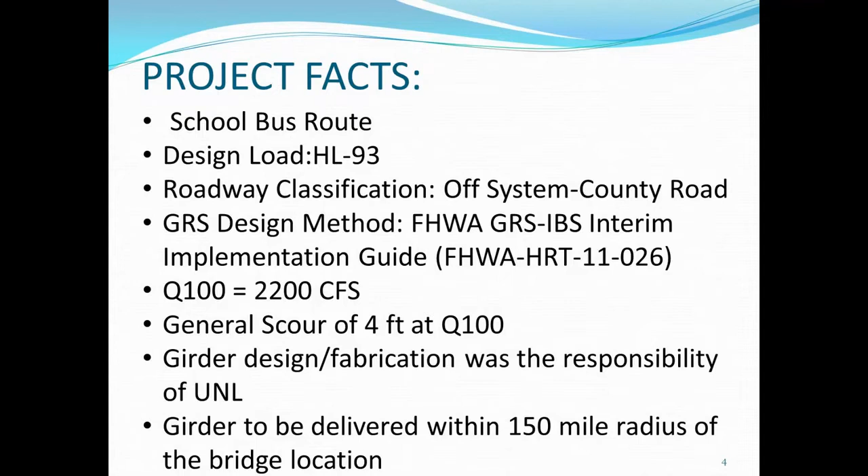The girder design was the responsibility of UNL under the CRIS contract, meaning the contractor had nothing to do with the design, fabrication, or delivery of the girder. The contract stipulated that the girder be delivered to the contractor within a 150-mile radius of the bridge location.

I know you probably can't see this plan clearly, but I'll give you a general view of the plan and profile. You can see the riprap and the width and length of the bridge, which I will state later. For this section elevation, the existing bridge only had a 40-inch CMP pipe.

The county stated that every year after the rain, the water overtopped the bridge, causing flooding, and they had to close the bridge. Therefore, we needed a bigger bridge opening or bigger size. Our hydraulics team came in and we selected this size, which is about a 58-foot span opening.

We can see the GRS abutment wings here, and we'll come back to that. The bridge clear width was 28 feet, and the overall width out-to-out was 32 feet. The GRS abutment from wing to wing was 40 feet, and from end floor to end floor was about 58 feet.

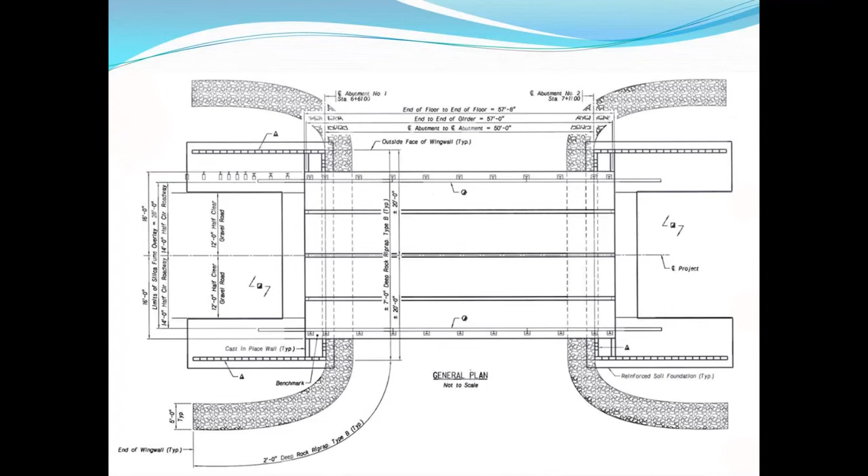Overview of the GRS abutment we used is really the typical GRS abutment, like the manuals in FHWA stated. It really consists of the RSF foundation, the GRS abutment with the granular backfill, and the facing, which we chose to be CMU concrete blocks.

We used this 7 foot by 5 foot by 7 foot to mitigate the scour, 4 feet we had calculated, and that was pretty good, conservative, but we wanted to feel good about this technique.

We used the minimum spacing of the GRS geotextile, which is 8 inches spacing around, all the way up. We doubled the spacing underneath the bearing. Since it's a county bridge, this has no approach slab. This has a gravel road.

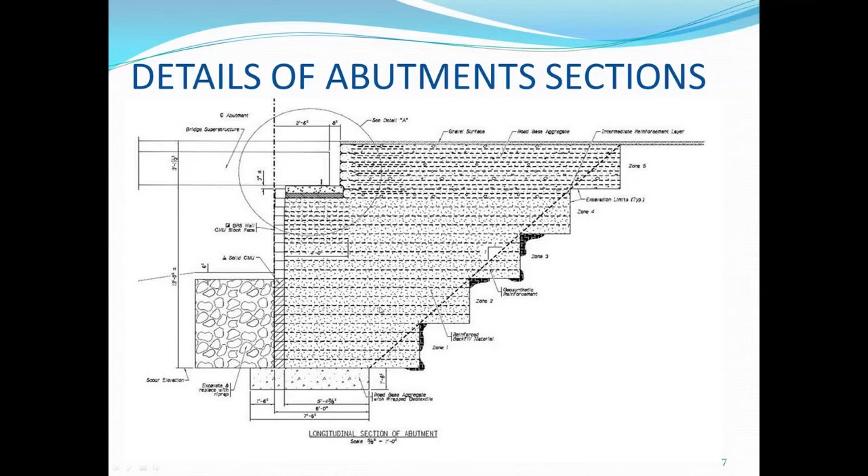Overall abutment featured the wing and the abutment; the RSF foundation is under the abutment as well as the wings, and it's a U-shaped abutment. It is a low volume road, consisting of about 125 ADT volume with 20% truck size, using agricultural vehicles, husbandries, and school buses.

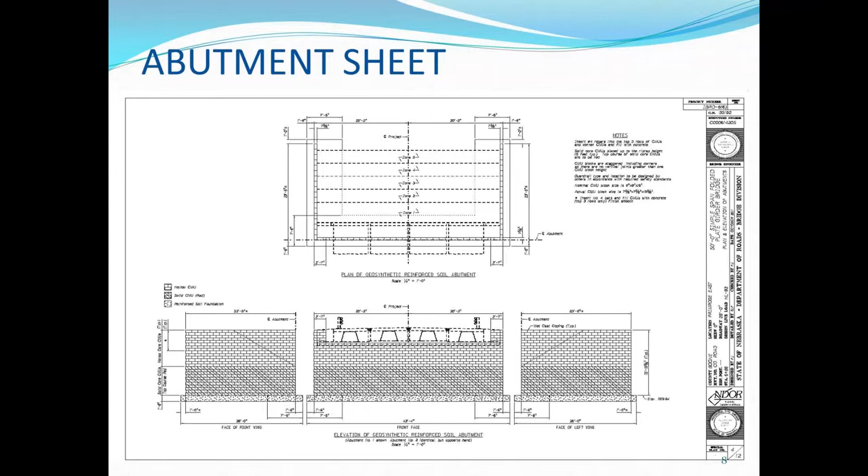Overall detail, I'm going to mention that this is the top of the girder seat we used. We used this cast-in-place girder seat. The top of the wall has to be connected with the concrete with rebars in it, and then the rest of it was a dry stack mainly.

Every GRS abutment was going to be laid down all the way to the top of the CMU unit, and then another block would sit on top of it as a dry stack only, which we're going to show some few photos of.

Overall the girder seat abutment, we're showing here the cast-in-place girder seat. The contractor, we gave him an option if he wanted to precast it. He selected to have the cast-in-place.

We will see the embankment for the gravel road that used as well - that's what we call GRS-IBS, which is an integrated system. The whole system will be deflected together with no bump at the bridge.

For the superstructure, it is a 4 girder system on folded plate using cast-in-place concrete. We used the empirical deck design for this one - it's four pieces, 2 exterior, 2 interior, joined with 8 inch closure pours with ultra high performance concrete.

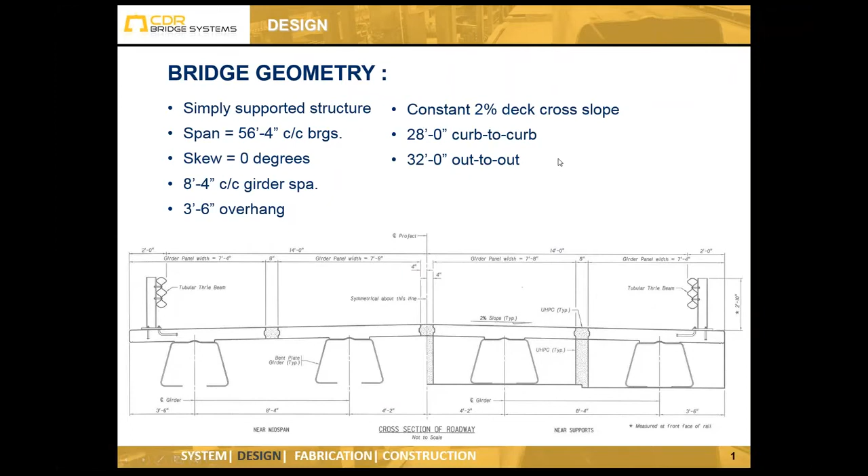The girder spacing resulted in a 7-foot 8-inch interior and 7-foot 4-inch exterior panel width, and used a 7.5-inch thick deck slab. The 8-inch closure pour did not use hairpin transverse reinforcement due to the use of the ultra-high performance concrete.

And as you can see in the bottom picture here, anchor bolts were to be precast into the deck slab for the structure-mounted guide rail.

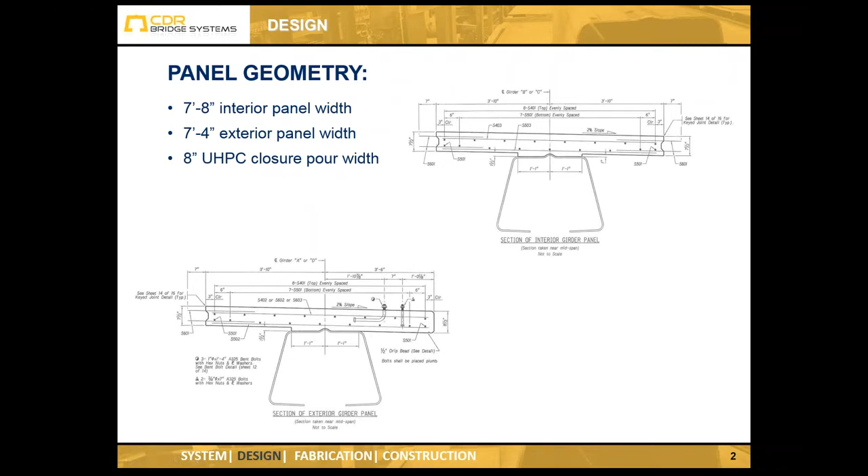The folded steel plate girders were designed in accordance with AASHTO LRFD 5th edition. For design purposes, distribution factors are based on a refined method of analysis. However, simplified distribution factors are available that give results similar to those of an I-girder. The design live load is the HL93, and live load deflection is limited to L/800.

The Boone County bridge used A709 grade 50 weathering steel. However, other corrosion protection methods are available, such as galvanizing, which was done in a folded steel plate girder bridge in Massachusetts, or by metallizing.

Section properties conservatively ignore haunch and closure pour, and the design is conservatively based on the girders being simply supported while the deck is being cast, or unshored construction. This is done to accommodate any future redecking.

However, shored construction is recommended and was used in both of the folded steel plate girder bridges currently in service. Shored construction minimizes dead load deflection and differential deflection between girders, which will make forming and pouring of the closure pours much easier. Low fatigue detail categories are used in the Boone County bridge. This particular one was a Category B fatigue detail.

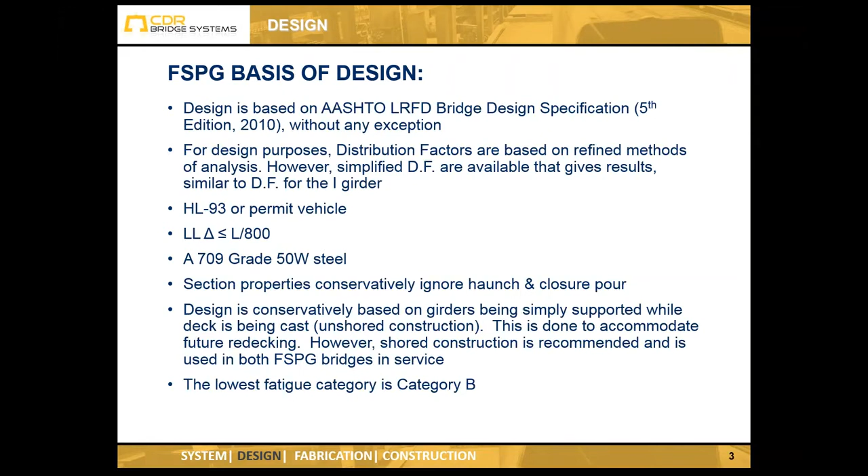The folded steel plate girder's wide top flange provides a good work platform during construction too, if needed, as you'll see in slides presented by Fouad later. The wide top flange allows installation of shear studs in the field if needed to meet OSHA requirements for fall protection. And the folded steel plate girder, unlike a regular steel tub, does not require lateral bracing of the top flange during unshored construction or redecking.

The folded steel plate girder has an opening at the bottom, which allows for easy inspection, and it can be used in conjunction with a large skew.

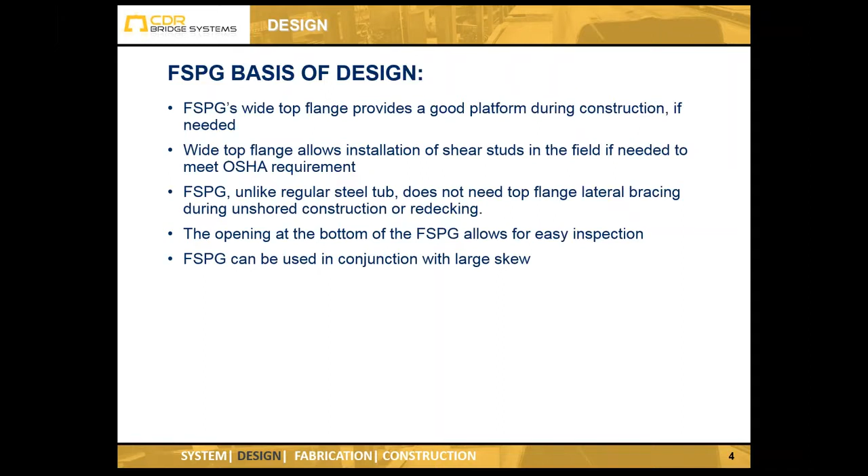The composite girder is compact and designed as a steel stringer. The composite neutral axis is located near the top flange. An additional 10 KSI of stress is assumed in the bottom flanges per AASHTO to account for lateral loads, but since serviceability or fatigue typically controls the design, additional capacity is available.

The folded steel plate girder is torsionally stiff. Intermediate stiffeners, cross frames, and diaphragms are not required, and this is important since differential deflection becomes more of an issue with skews greater than 20 degrees.

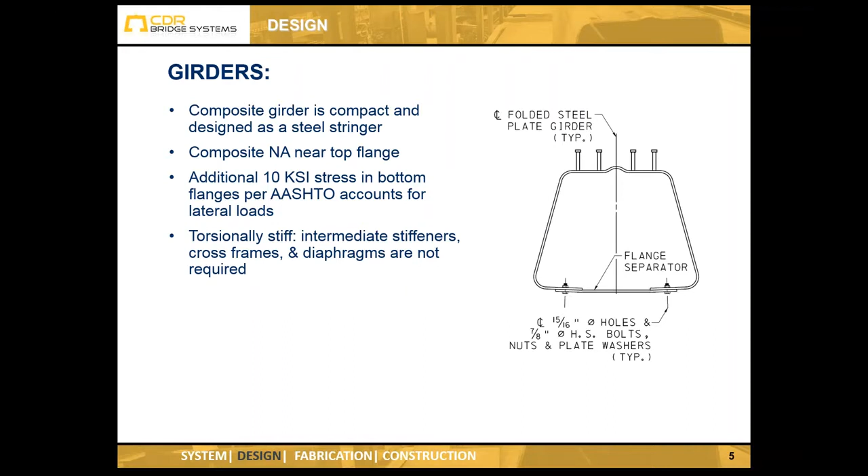The as-designed folded steel plate girder typical section used for the Boone County bridge consisted of a half-inch plate thickness, nominal depth of 29 inches, nominal base width of 44 inches, which resulted in an approximate 11 kip girder weight.

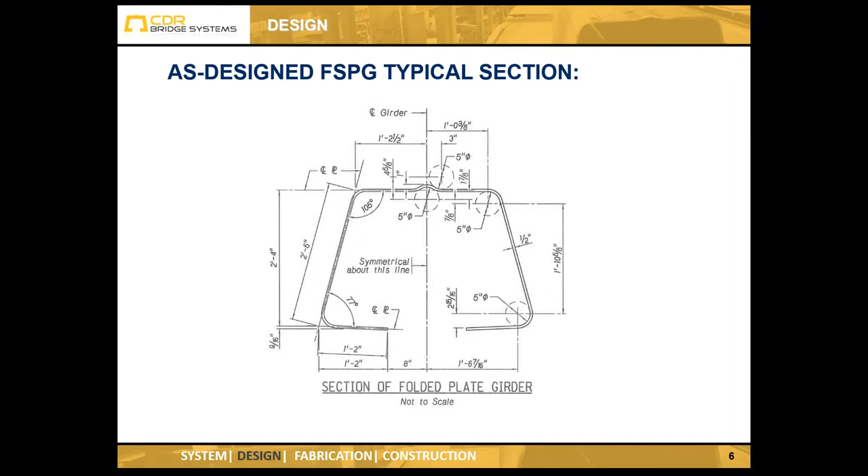The bearing assemblies consisted of bearing stiffeners, which were also used as forms for the concrete end diaphragms. Shim plates and sole plates are beveled transversely and longitudinally to provide full contact at the bearings, and elastomeric bearings were used underneath the sole plates.

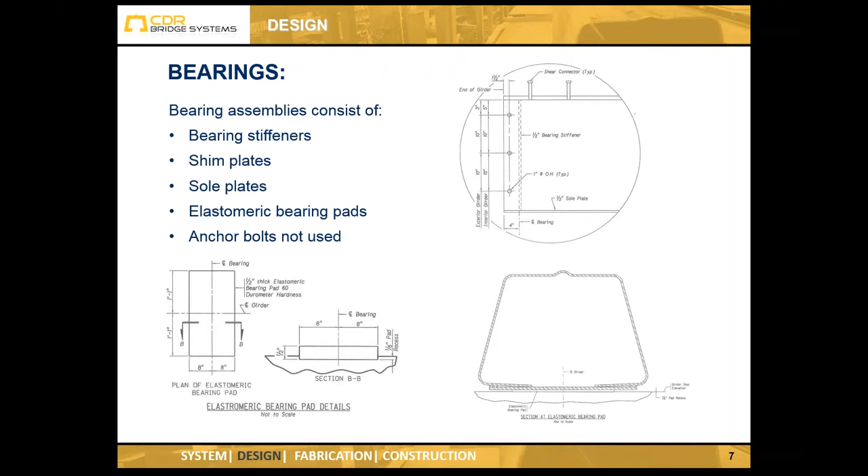Anchor bolts were not used in this application. Instead, it was decided to recess the bearing pads 1/8 of an inch. As I stated, back walls are not required. An 8-inch thick concrete end diaphragm was used to accommodate thermal movement and end rotation, and no approach slab was needed due to the GRS abutments in the approaches.

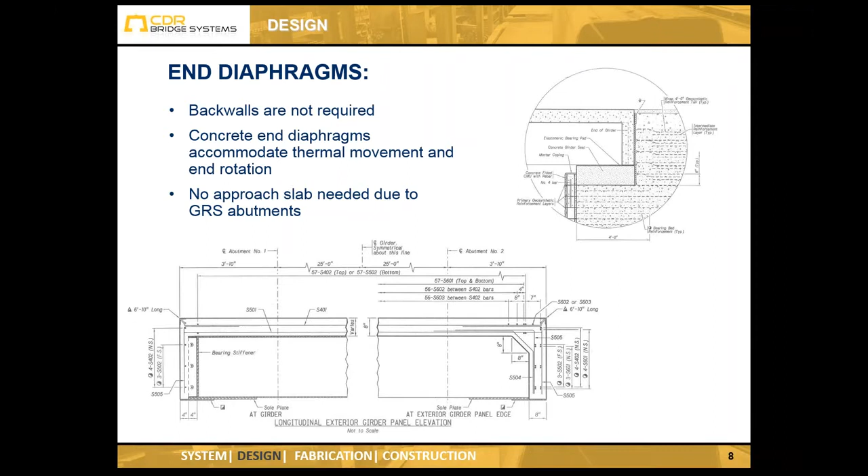The design resulted in a 57 kip maximum pick weight, utilizing normal weight concrete. If lightweight concrete had been used for the design, the max pick weight would have been reduced to about 35 kips.

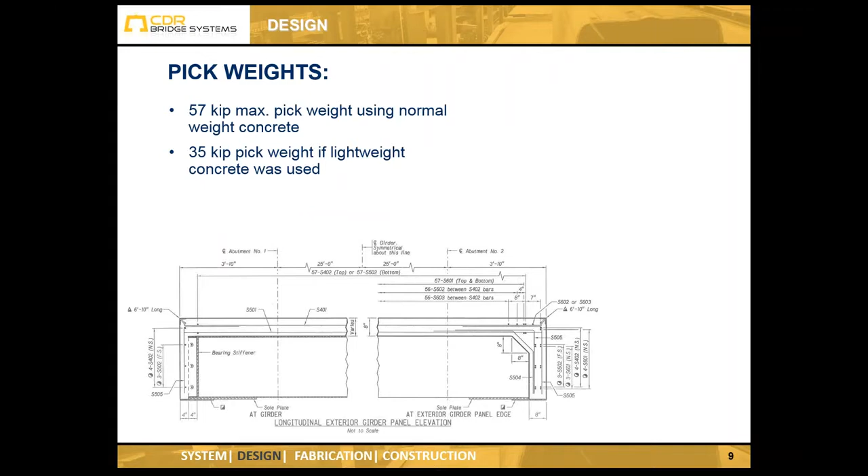The fabrication of the plate girders was performed in 4 simple steps: bending, installation of miscellaneous hardware, installation of shear studs, and then the precasting, which was actually done on site.

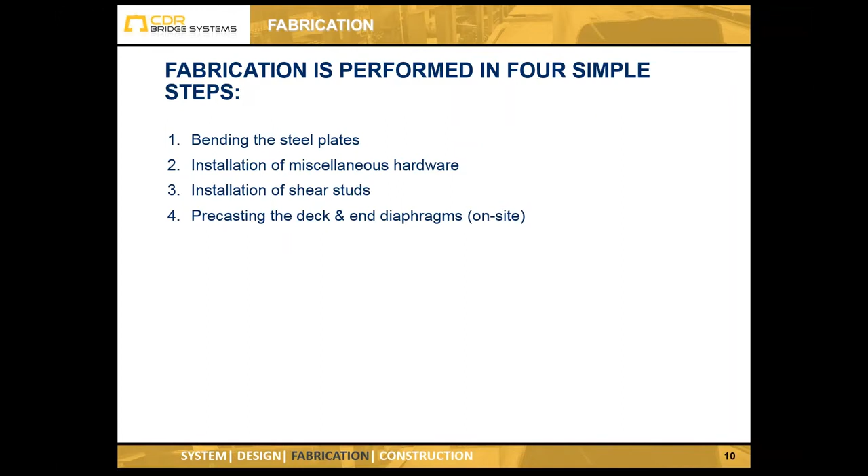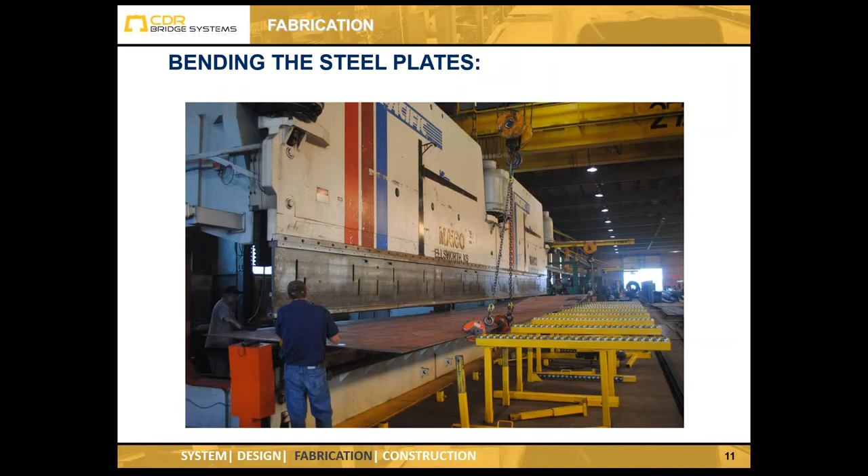The girders were fabricated at Myco Industries in Ellsworth, Kansas, and the bending required a 3 to 4 man crew due to handling. As you can see in the far portion of the photo, the plate is fairly flexible until bends start becoming introduced into the girder. The girders are cold bent in approximately 2 to 3 hours each, and this slide shows the final bend being introduced into the girder.

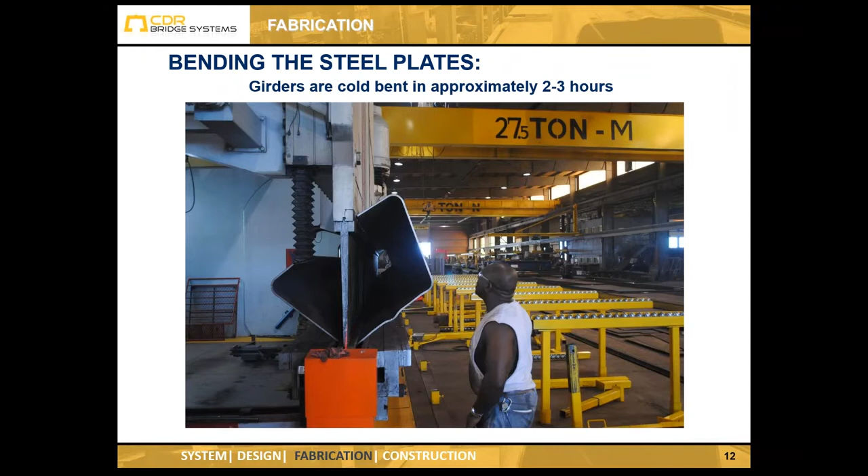Then the installation of the miscellaneous hardware, bearing stiffeners, flange separators, and sole plates were installed in approximately 1 to 2 days. The final step is the installation of the shear studs, in approximately 1 day.

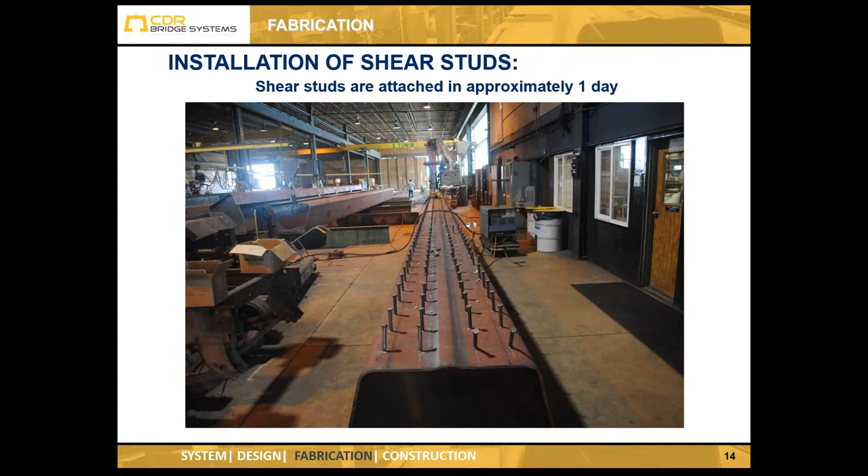At this point, the 4 folded steel plate girders were shipped to the construction site in East Primrose, Nebraska on 1 flatbed, where, initially, the contractor chose to offload the girders with a forklift and a strap. However, the strap snapped, and he dropped and damaged one of the girder webs. The web was heat straightened without incident, and all 4 girders were turned over to the contractor for precasting.

At this point, I'll turn it back over to Fouad to continue on with the construction of the bridge.

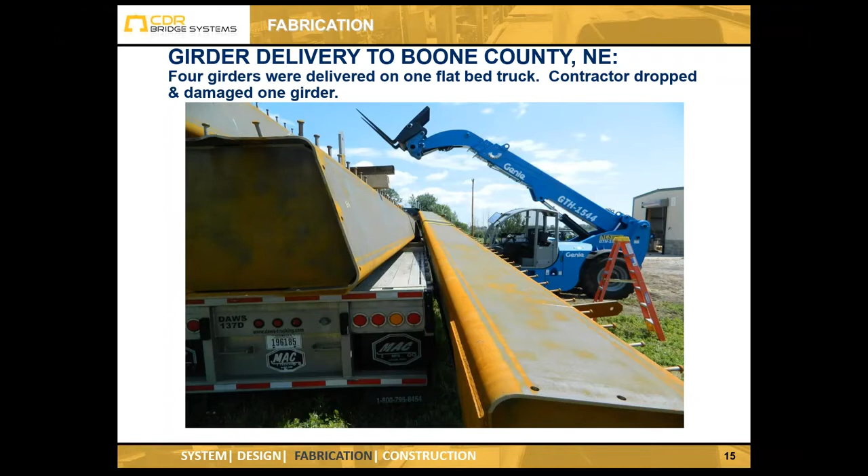Because of that incident that Matt mentioned, the contractor brought in a crane so he didn't want to use the forklift anymore. He brought the girder to a staging area where he's going to prepare to pour the slab.

He blocked them all to the final elevation of the proposed bridge. Remember, as Matt mentioned, with this system we cannot camber the girder, so we have to use shored construction to prevent deflection. Continuous and unyielding support was required per contract, and you can see we required the contractor to use this wood system, about 3 foot spacing underneath it, and again he blocked the girder elevation to the final elevation.

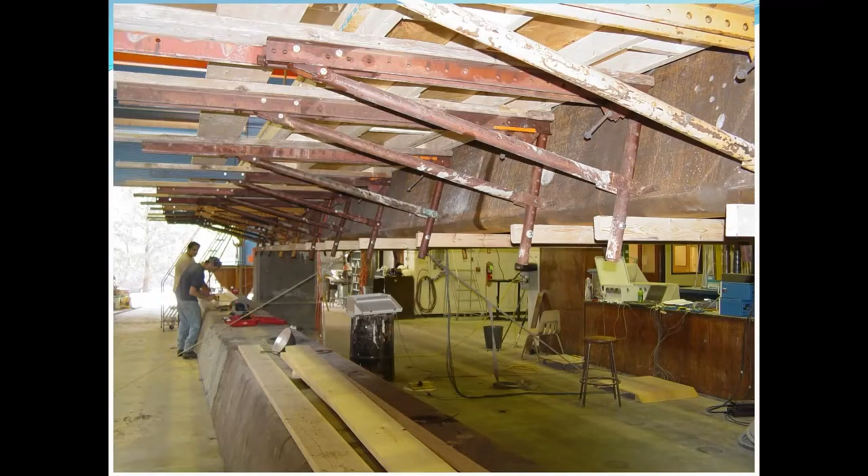Since the contractor was using folded plate, a new technology, he had no idea how to form the deck. So we gave him an idea, what the University of Nebraska did in their lab for the kickers outside, which was good if he wants to pour the deck one girder at a time. So we gave him that, since that's what they used in the lab.

Unfortunately, the contractor decided to form the whole bridge to be poured at once. So he devised his own system. You can see he divided those steel blocks to support the plywood, and the deck was poured over the plywood.

That was needed for him because he needs access to the bridge right away. He only had 24 hours to do the ultra high performance concrete connection.

On the right, we can see the iron worker already put the iron together and formed it. For the overhang, he just used the typical shoring, and it was easy for him to do because the bridge was already on the floor. Obviously he couldn't do that if he was doing cast in place over the bridge deck, so it worked out well for him.

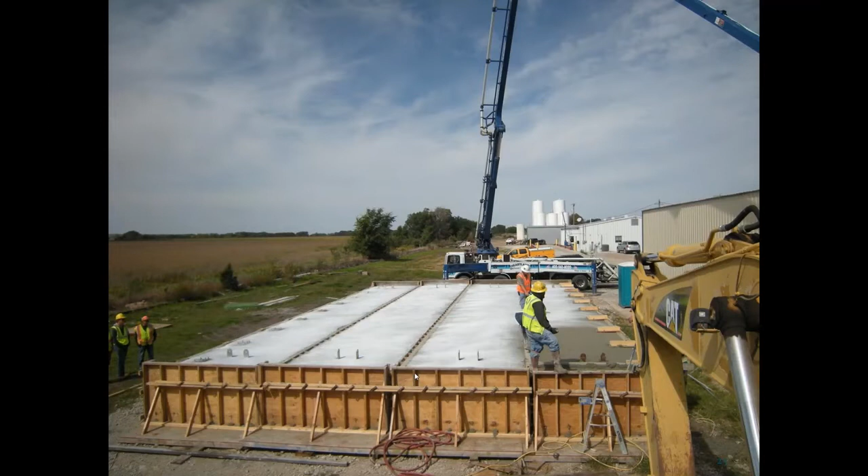For the deck placement, he used a pumper, as we can see, and he elected to pour one girder at a time longitudinally with the same system. After he finished one, he hand finished it, then did the second one, came back and did the third, and finished that. He put the curing compound, then came back and put wet burlap.

Side note: Nebraska Department of Roads has now changed our policy. We require 10 days wet cure burlap and 7 days curing compound. This is a new policy after this bridge was done, not because of this bridge, but because we had a lot of cracks in the past due to the way we were curing our bridges.

With this system we could easily use 10 days if he wants to, but for this one he used curing compound and then came back and did the wet burlap. Actually, we had a pretty good deck with hand finish, surprisingly, which is a good thing.

In the past project, using this system with closure pour, we had to use headed bars, which required a 12-inch opening, and because of shrinkage of the concrete mix we had to use an overlay. In this project, the attractiveness of ultra high performance concrete is its very low shrinkage according to research. So we used 8 inches instead of 12, and the rebars were easily connected together, unlike the previous one where we had a very hard time connecting the headed bars.

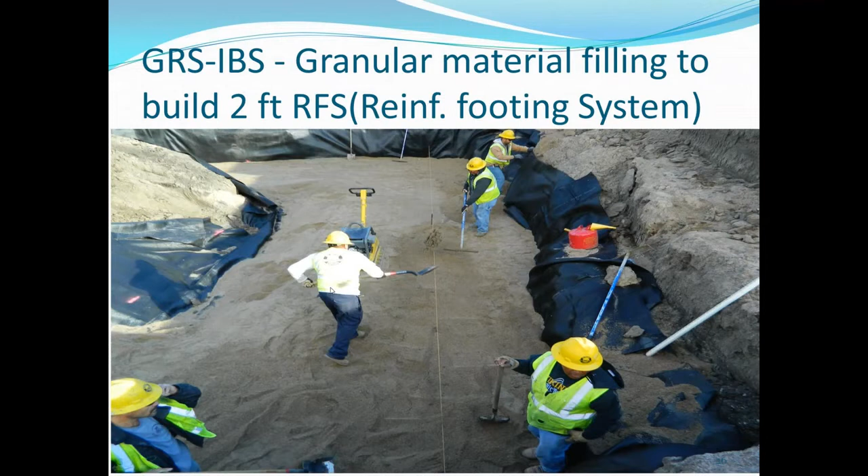After finishing the footing, he started laying out the first layer for the wall. It was very important for him to make the first layer straight, so he used a half-inch sand layer to help level the first block of the wall.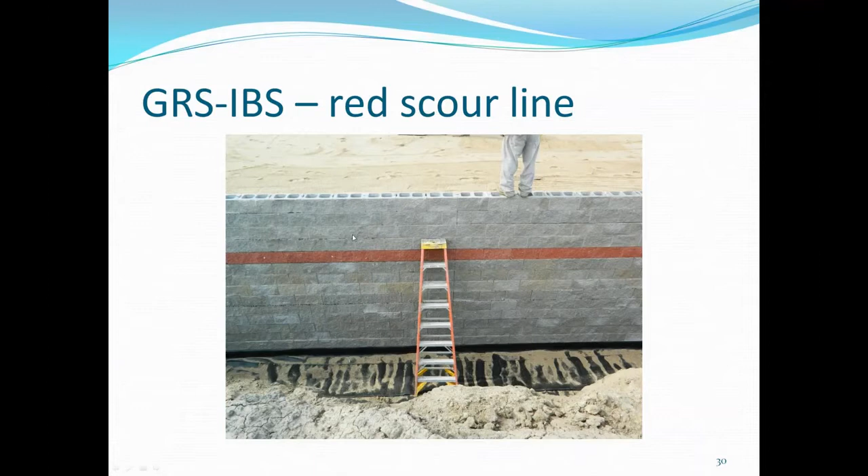Another note: we used solid CMU at the bottom and hollow at the top, according to the FHWA manual. The contractor stated it was hard for him when compacting next to the hollow CMU to keep it straight and level, so he had to support it. He asked if next time we could use solid CMU throughout, and I think that's a good idea.

Now we're trying to get the girder deck erection done. The contractor used 2 cranes, as I said before, and 4 trucks to move the girders to the project site, about a mile away from the staging area.

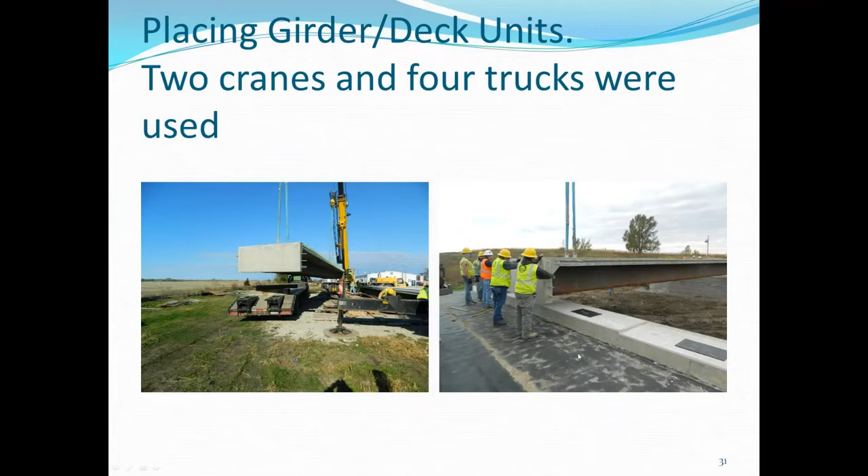Then he put it on elastomeric bearings and cast-in-place girder seat beam. Because he formed the whole thing together, we had very good alignment between units and very minimal differential deflection between them. That was a success for us, and we liked that.

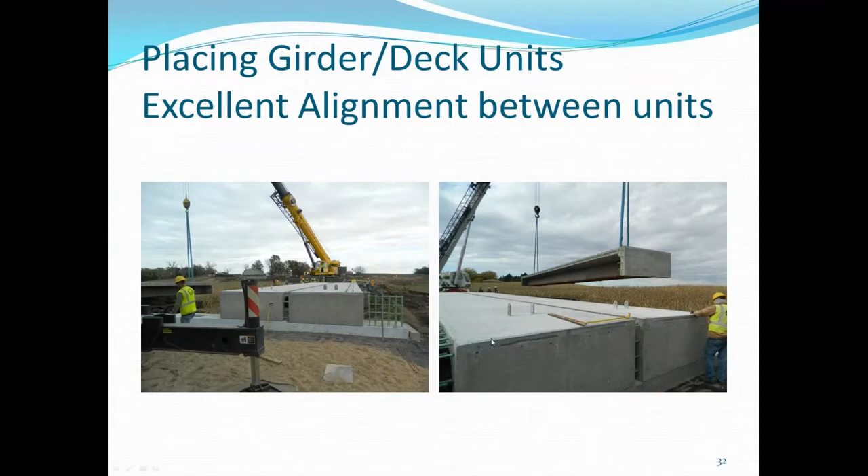Here we're showing the whole bridge deck unit in place. It took about 2.5 hours to erect all four girders together. In this photo you can also see we already completed the riprap underneath it, and Nebraska used topsoil for the riprap, so you probably don't see it, but it is there.

At this point, I believe we had used about half of the closing date already. Giving some back, he lost about three days to the rain. Now all he had to do was come back and fill in the approaches for the county road.

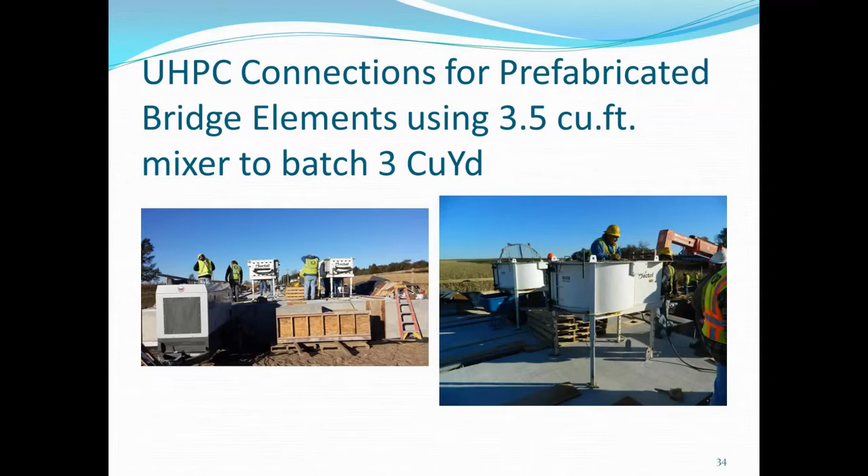For the ultra-high performance concrete, the contractor contracted Ductal from Canada. They came with their 3.5 cubic foot mixers. We only needed 3 cubic yards of ultra-high performance concrete to fill the 8-inch closure pour.

The representative was on site. We like to have two of them, but they only sent one, and I think it would be a better idea if we have two representatives instead of one.

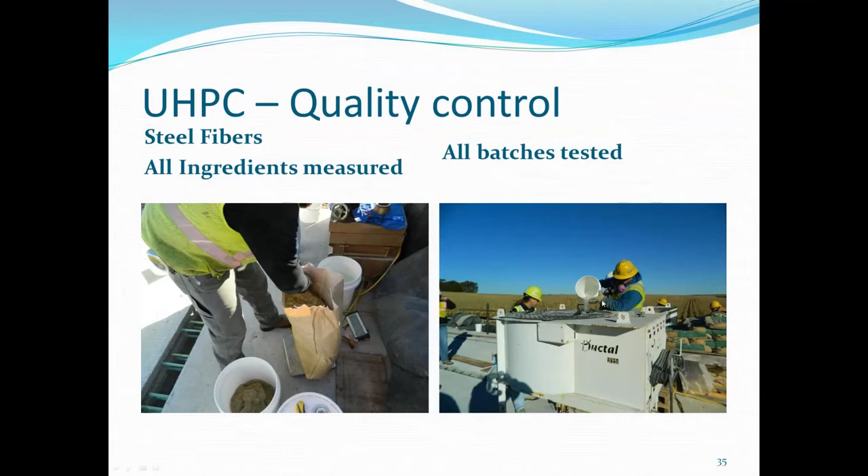Nevertheless, all the ingredients were measured for the quality control, and the supervisor was over here, and the mixing started. By contract, the mix was the responsibility of the Ductal company, and they chose a 21 KSI 28-day concrete, 12 KSI at 4 days, and about 8,000 at probably 24 hours.

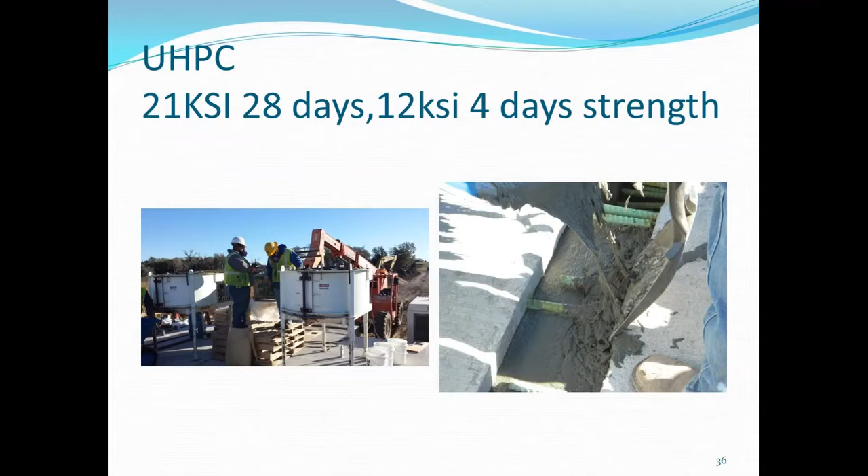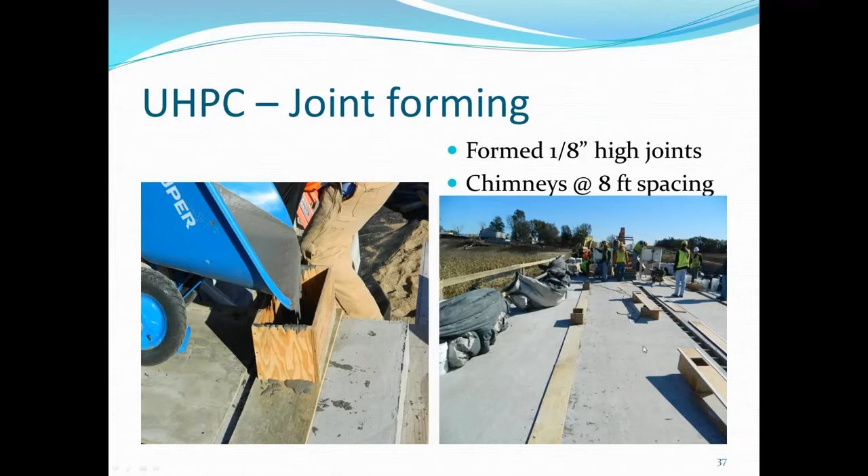We required the joint to be overfilled with 1/8 inch so it can be ground at the end, because of the self-setting nature of the ultra high performance concrete. So that's what they used. You can see over here they're using the chimney to help the matter, and that helps to keep the ultra high performance concrete moving. The spacing of the chimney was about 8-foot spacing.

The UHPC material had very good flow, so we didn't have any problem with that. Especially since we have only 2 inches drop from one end to another, the concrete was flowing okay.

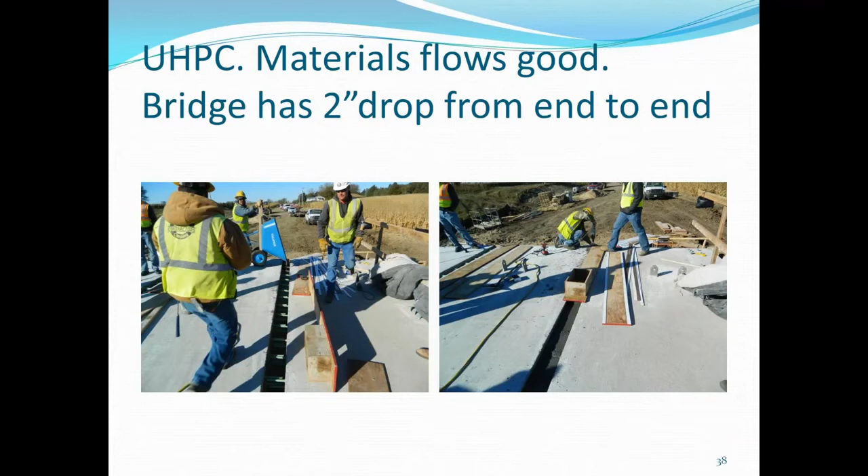In order to finish the grinding of the 1/8 inch, he was using a floor grinder, and it was really a little bit harder than he thought, but he got it done because the concrete was probably about 12.5 KSI, fast curing. So the grinding went well using the floor grinder. Got a picture here before the grinding and after the grinding.

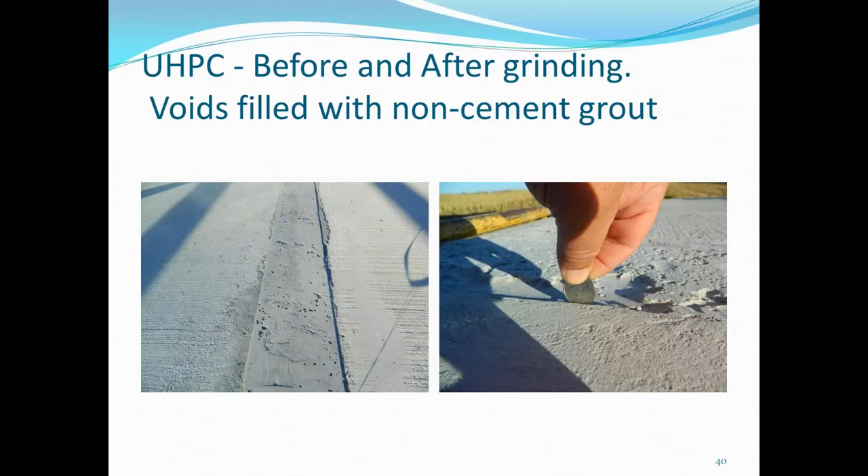Looks like the 1/8 inch overfill we provided wasn't enough. Maybe 1/4 inch would be better. You can see some settlement of the ultra high performance concrete, and that caused some irregularities in the joints. But it's not as bad as it looks; it was okay. So Ductal recommended using non-cement grout to fill the irregularities, and we did so. And then we ground it one more time, and then we were done.

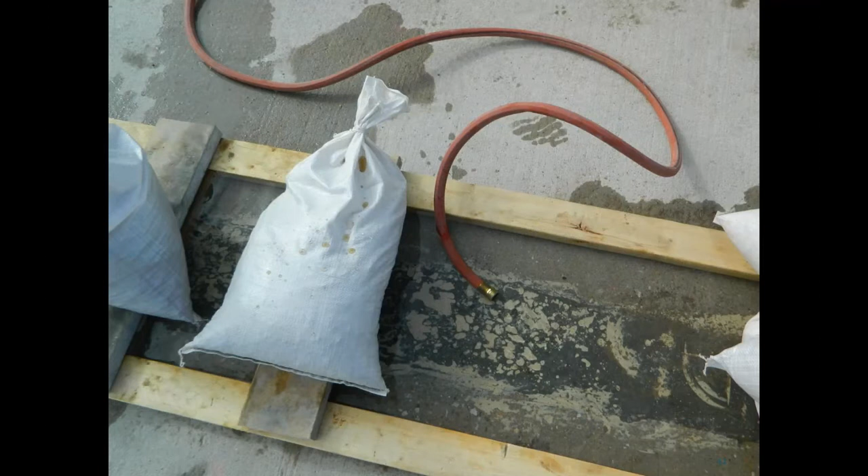Obviously, we're required to test for ourselves to see if we have leaks or not on the bridge. We did a water test. As you can see, the contractor dammed every joint and then flooded it with water. We made sure that we have enough water for every joint, and then we checked underneath, and we had success. We had no water drop whatsoever. Actually, I would be happy with dampness if there was any, but we didn't have anything, not even dampness.

So we think it's a success, we had no leaks, and that's a good material to be used on our closure joints in the future, and we're gonna think about that. You can see that he used the wood form underneath the deck to form the closure pour, and then you can see the trace of the wood forms. Nevertheless, we have no leak, no dampness, no nothing, so we think it's a success.

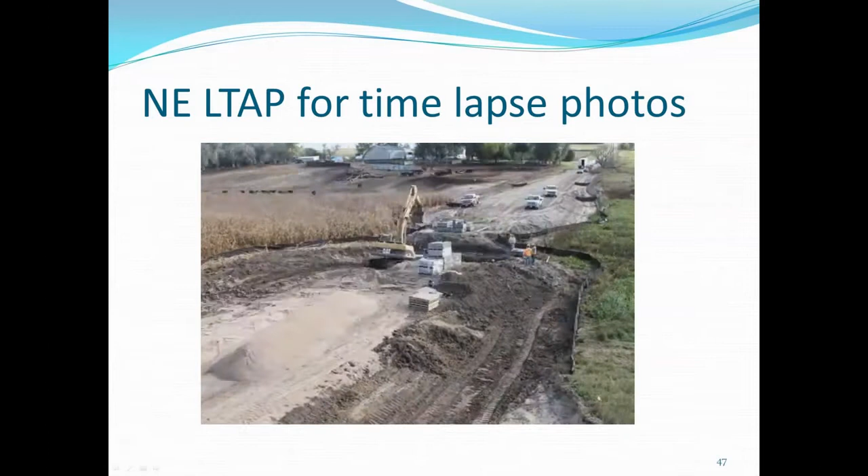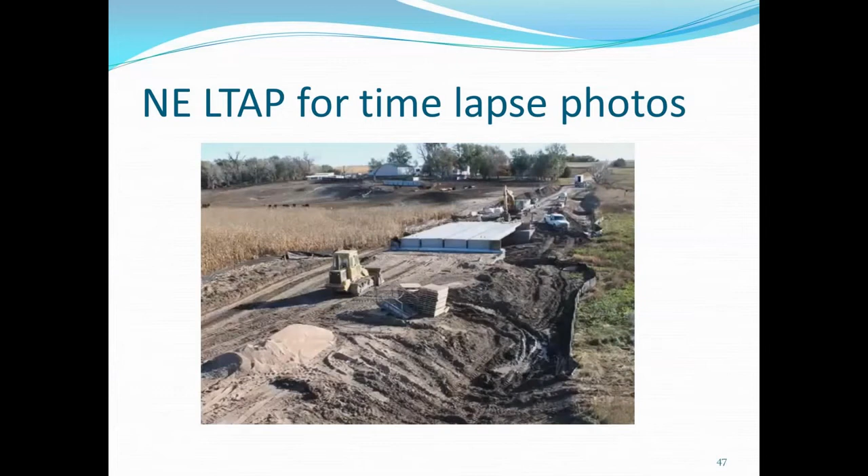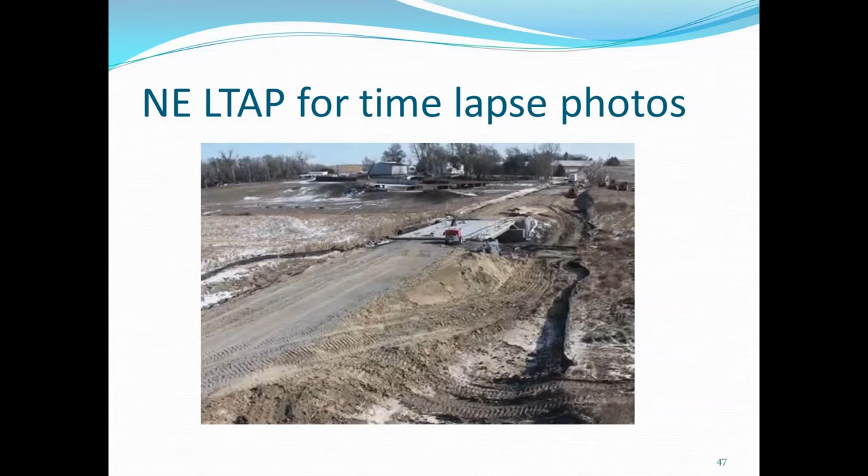And after that, the bridge was open to traffic November 19th, 2014. We gave the contractor back 3 days for the rain, so that's why it was probably about 33 days. But we considered his contract fulfilled, and he was ready to do what he needed to do for the bridge opening.

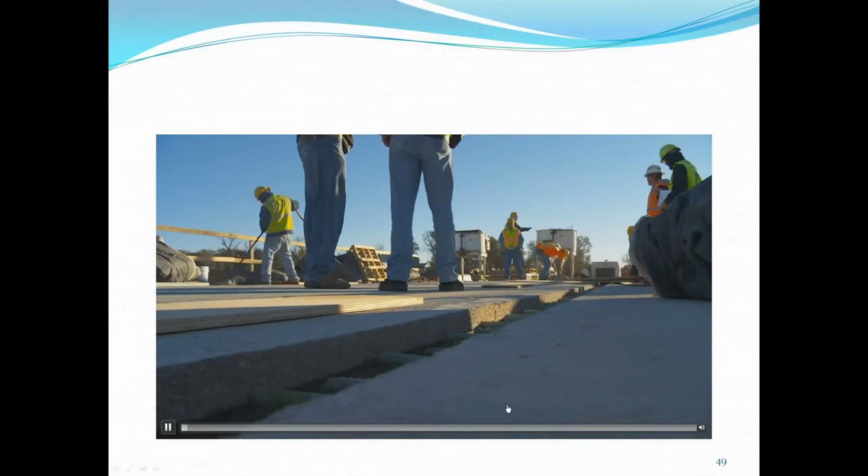Everybody's waiting for the cost, and that's what Khalil was talking about. It was a costly project, we can tell, maybe because of a lot of innovation in it and unfamiliarity of the contractor with the system we're using. We only had one bidder, the only contractor who bid, and he got the project. Even though we did advertise and we did have the pre-construction conferences, it looks like nobody was interested in doing a GRS abutment for some reason or another.

So this cost, as I said, is $455,000 without the girder. The GRS abutment was $265,000. If I compare it to a typical bridge we do in Nebraska for county bridges, it's probably double. We can probably do the same abutment with piles, sheet piles and the concrete beam, as we typically use, for about $150,000. Nevertheless, this is the cost of innovation.

Ultra high performance concrete cost $200 per linear foot, and we had 192 linear feet because of 4 joints on the floor, so it cost us about $38,000. The folded plate girders cost $90,000 delivered to the site, and that was subcontracted from the university to CDR, and he can speak for that.

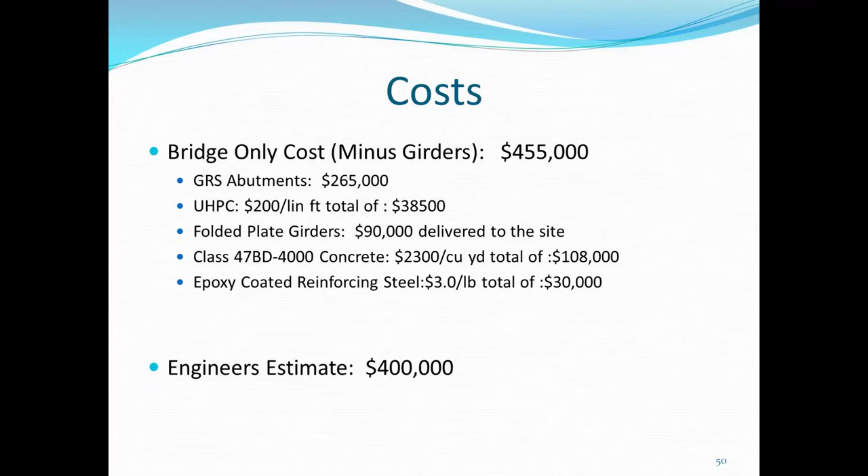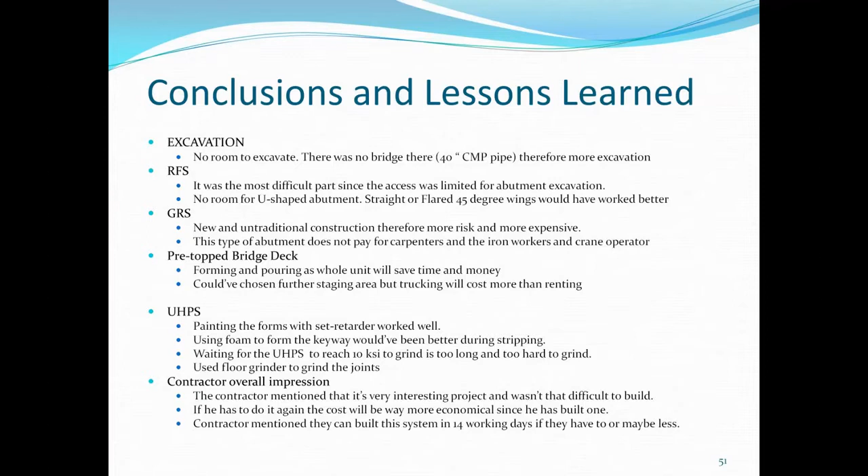Folks, we received a good amount of great questions during the webinar and, of course, prior to the webinar. And I've got them grouped for us. We've got those in design, and I broke the ones in design specific to the GRS-IBS wall and the folded plate girder. We got a few on the UHPC as well. We have questions related to construction, performance, and inspection, and of course cost. So we'll go ahead and start with the design ones first, and I'll go into the general design questions too.

So Fouad, I don't know if you can answer this one, but why was the bridge selected over culvert alternatives? Why a bridge, or why the folded plate girder? Well, remember we have a research project, and we were under the research IBRD. We have an implementation, and that implementation has to be for this folded plate system. At least at the beginning, we have to get a 60-footer or below 60-foot. Really, we waited a few years to get one on the state system. We couldn't find one. And when we got the county one, which is a short bridge, we grabbed it.

So really, for us, yes, I agree. We weren't comparing life cycle between these two systems, because we wanted to try. That's an implementation of a new idea, and that's really what happened. Now we know. If we have to do it all over again, at least we have an idea to select the appropriate system for every bridge. So it's a short tale. We had to use IBRD money for the construction, and that was good. That bridge was for implementation.

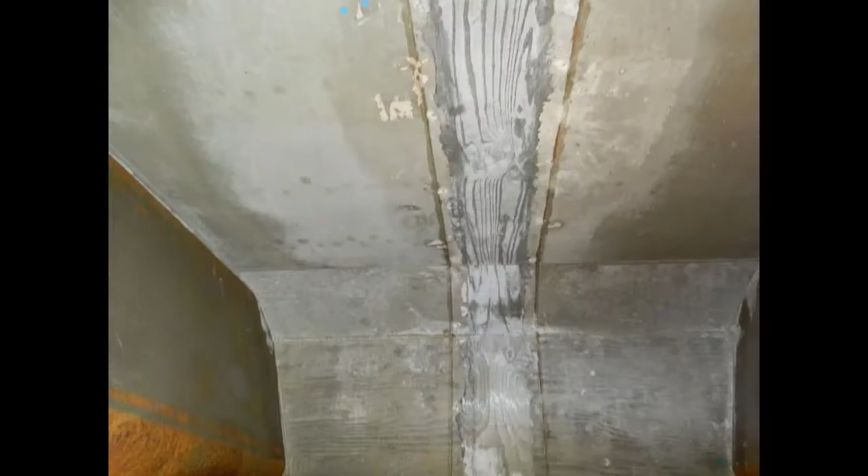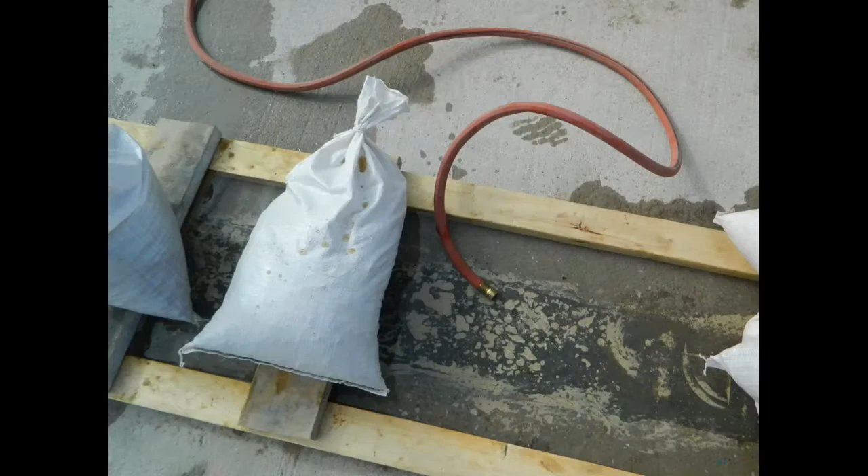The question was, what sort of beam seat size did you need at the bearing locations, both in front? Keep going forward - there it is. If you look at the abutment at the far end of the picture, you have a corner with your GRS-IBS, and you also have the beam seat in front of the bearing.

Was that prescribed for FHWA's guidelines with the GRS-IBS, and what kind of beam seat width did you have there? Let me check the plans - the beam seat width per plan was about 3 feet 2 inches behind the CMU wall.

The center line of bearing was about midway back there. Obviously, the concrete end diaphragm lines up with the rear of the seat, but I'm not sure if that answers the question. I think we have this - it's about 3 feet into this, 3 feet, from the wall.

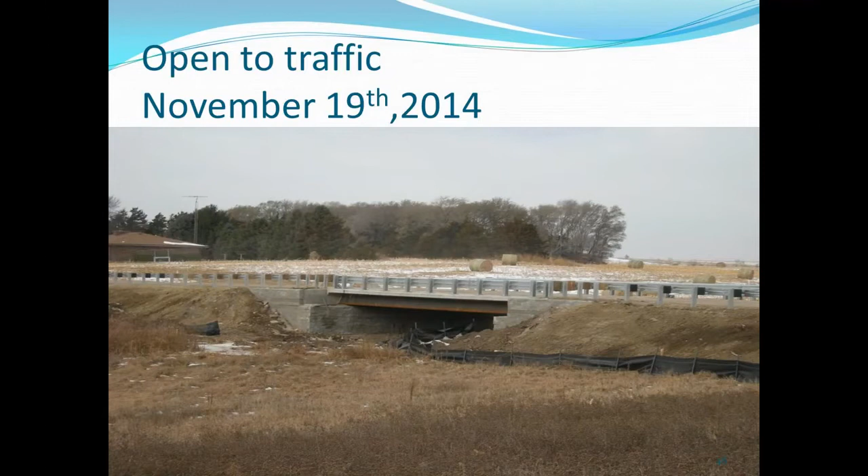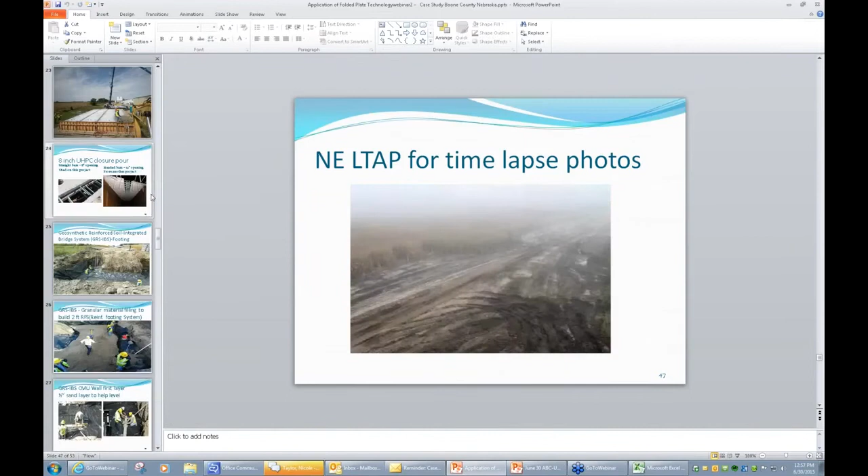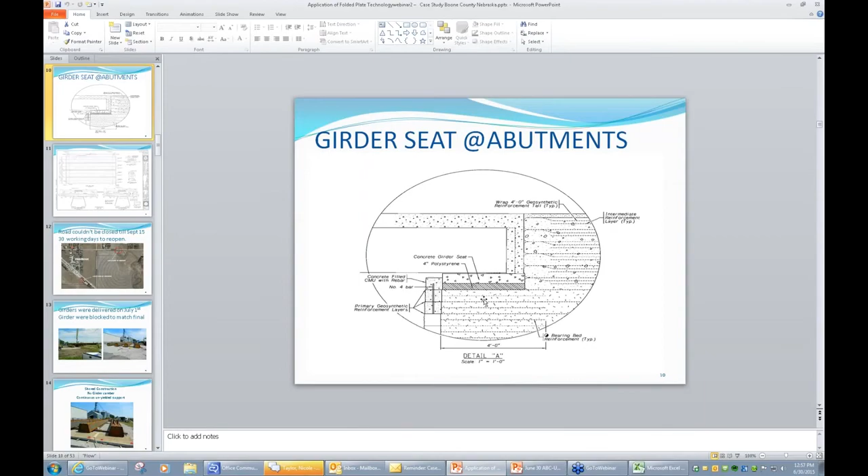Give me a second - I think if I understand the question correctly, that was shown at the beginning. Is that it? There we go - we had to go about 3 feet 6 inches beyond the wall so we could minimize the pressure on the wall, and that's the intent of it. That was in the manual and the guidelines.

Stay on that slide, because we have another good question related to that: can you explain the bearing installation without the use of anchor bolts? So why don't we use an anchor bolt? It's not a seismic area, so there's really no uplift on this bridge whatsoever - in Nebraska we have no seismic concerns.

And really what we do to prevent the walk-out, the elastomeric bearing would be embedded 1/8 of an inch into the concrete, recessed 1/8 of an inch. That will prevent the walk-out of the bearing, if that's the question. And then you've got the passive resistance of the wall up against your back.

Ben, can you hear me? Yes, Atorod, we can hear you. Yep, let me answer that question.

This is a very short span bridge, and thermal expansion and contraction is very small. It's a semi-integral type bridge, and it's allowed to expand and contract freely, so there's no real need for any kind of anchor bolts in this kind of system.

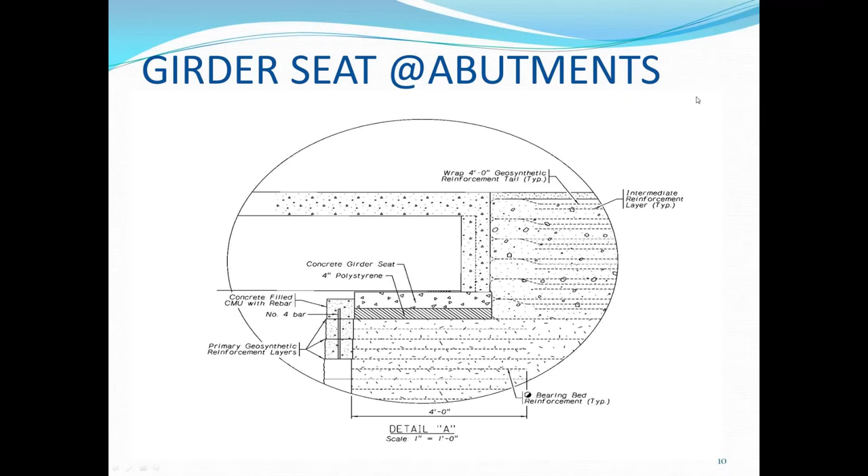And can you say a little bit about the design method? Do you use particular software? How do you go about designing a folded plate girder? Well, originally it was developed using finite element modeling and testing, and we developed a simplified method that we use in-house, probably more based on a line girder analysis. We do have design spreadsheets available for the 22 standard sizes.

And frankly, you could go to cdrbridges.com and download those design spreadsheets. It has different girder spacings and span lengths, so you can get various design section properties. As far as that goes, we conservatively use a line girder analysis, but in talking with some DOTs in the past, they were worried more about permitting of overweight vehicles, so they may want a more refined analysis, and we can do that as well.

Okay, great. And what was that website again? CDR.com? cdrbridges.com. Okay, great. So there were a couple questions regarding bird nesting on the bottom flange below.

Are there certain strategies that can be employed to prevent that from occurring? There is a detail, maybe we didn't show it, we didn't put it there. We put plywood to cover the bottom of it, so plywood allows the inspector to look inside, you can pull the plywood up, but there's plywood inside the girder. That prevents animals or birds from nesting inside.

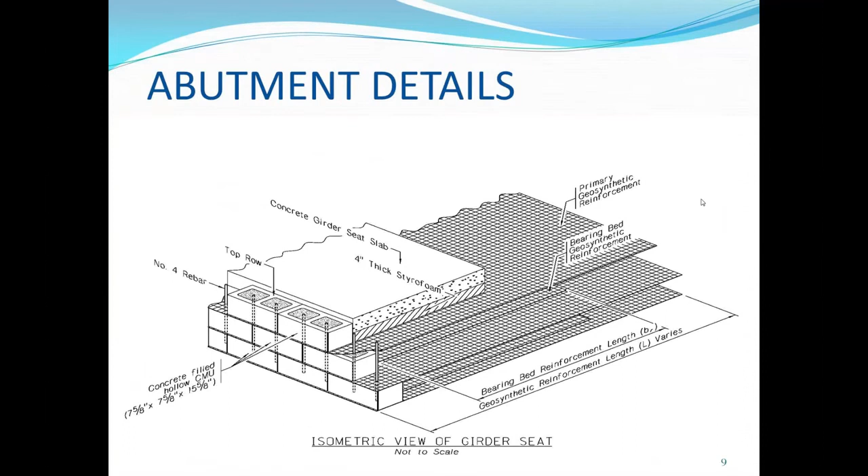Ben, can you hear me? Yes, Atorod. Let me add to what Matt said. There are separators placed in the bottom flanges of the girders that are meant to provide mainly the torsional rigidity if unshored construction is used. So the true application of the folded plate uses shored construction, so you don't really need that. Now after the deck is hardened and the live load comes on, you really do not need anything extra. In fact, even if you didn't have that separator in the bottom flange, you would be better off, but nevertheless we leave those in even after the live load comes in.

But even if you decided to do unshored construction, adding those plates, which are about every 10 to 15 feet apart connecting the bottom flange, gives you torsionally a property that is very close to a closed box. That's one of the reasons why we do not need cross frames inside the folded plate or between the girders. That's the main advantage with the system, that you eliminate the need for all the bracing requirements. There's no need for the top lateral bracing that you need for boxes, no need for cross frame inside the boxes, and no need for cross frame between the folded plates.

And that sort of answers this other question too, Atorod: what's the advantage of a folded girder to other section types, whether they be I-sections or pre-deck sections like NEXT beams and things of that nature? Yep, but really, primarily the I-section. Are there other advantages of going with the folded plate versus some of our conventional beams?

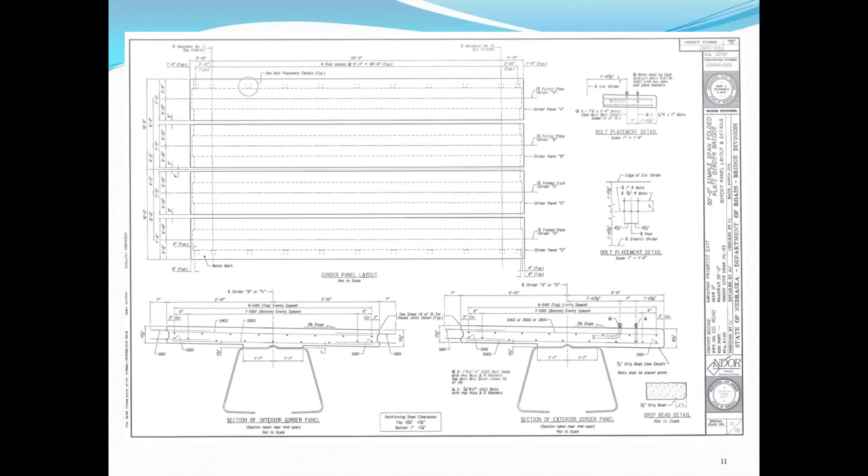Okay, and the AASHTO code, does that address some of the code requirements? There is no exception to the design provisions listed in the AASHTO LRFD bridge design specification. The design of the folded plate is 100% in accordance with the AASHTO LRFD bridge design specification, and there's no exception. For the distribution factor, there's an in-house capability that uses refined methods of analysis, but at the same time there's also a simplified equation you can use. So to answer your question, no, there is no exception to the design provision listed in AASHTO LRFD bridge design specification when you design the folded plate girders.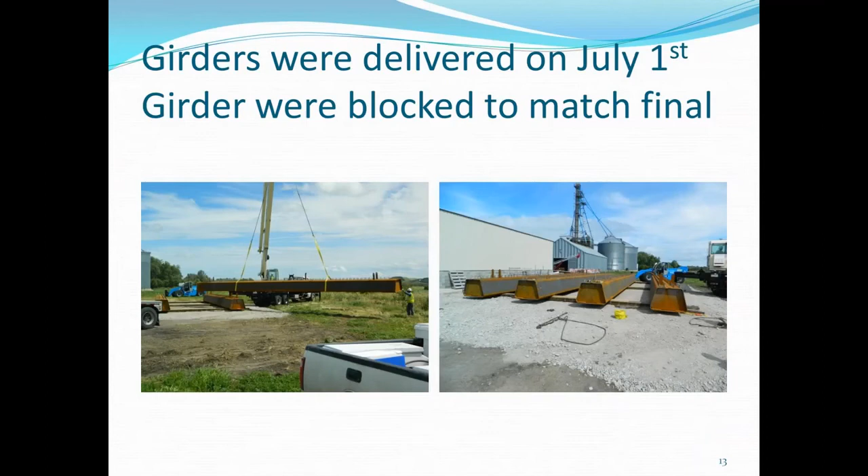Okay, so Fouad, this might be a question out to you. If you're going to do another folded plate girder, would you consider a precast deck to reduce your crane size? Yes, if we had to do it all over, actually that was one of the contractor's comments, and he told us probably the system would be even better, would help a lot.

So if you use a precast deck on top of that, that's probably our move next time. We're going to do something like that.

Okay, so I'll move down to some of the construction-related questions. Did you guys experience any concrete cracking during the transport of the beams?

No, the whole construction went flawlessly. According to my construction guy, he was very happy. This was his first bridge, he had no problems, and we have nothing owed to the contractor, so we did good on that. The whole thing was crack-free.

There's a couple questions regarding the time, and I believe you explained it well in your presentation, but the question was: did the 15 days include abutment excavation, abutment removal, or in this case your pipe removal, in that 15-day time period for this particular project?

Yes, the whole thing was actually - if we take out the 4 days, because remember there was rain, so we gave that back to him - really it took him about 15 days. So yes, including the excavation and putting the riprap under the bridge, the whole thing except the rail.

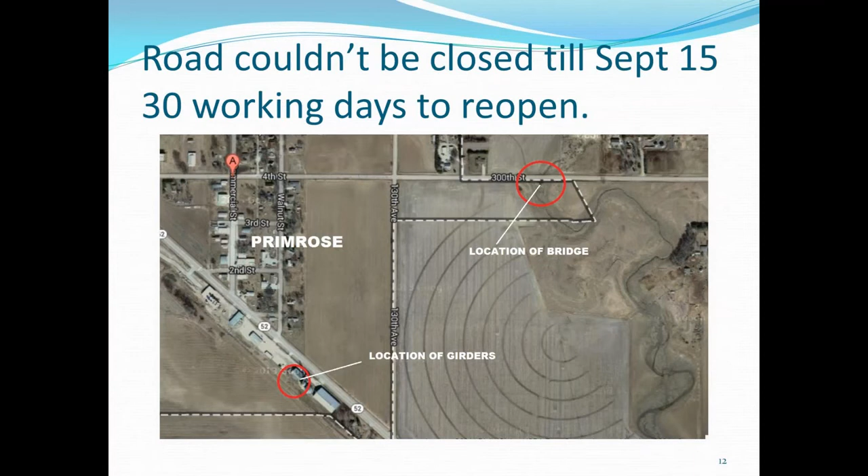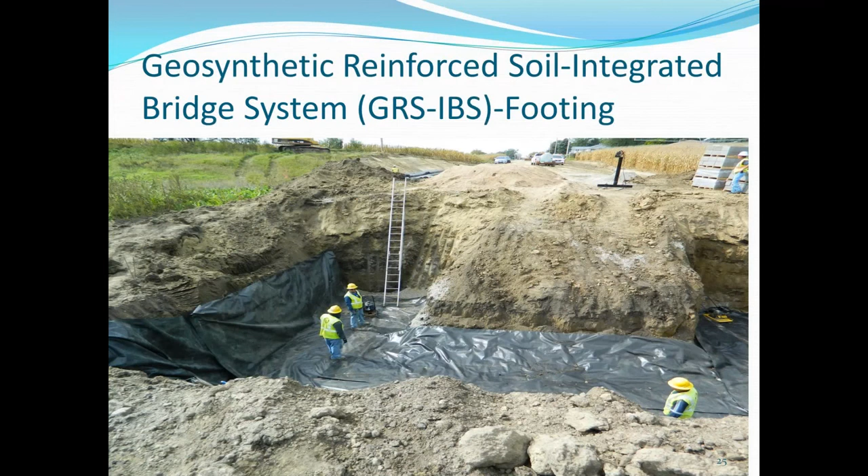Now, does this bridge have slope to it in the transverse and longitudinal direction? Yes, it is 2% cross slope and about 2 inches of tangent curve, not vertical curve, from one end to the other. So pretty flat, more or less.

And the beams, in this case, it seems like a lot of the folded plate girders are pre-decked in the fully supported condition, so there's no camber put into the beam. Is that correct? That is correct. We cannot put camber in during fabrication, like Matt mentioned, for now. That's why we went to shored construction, as I mentioned.

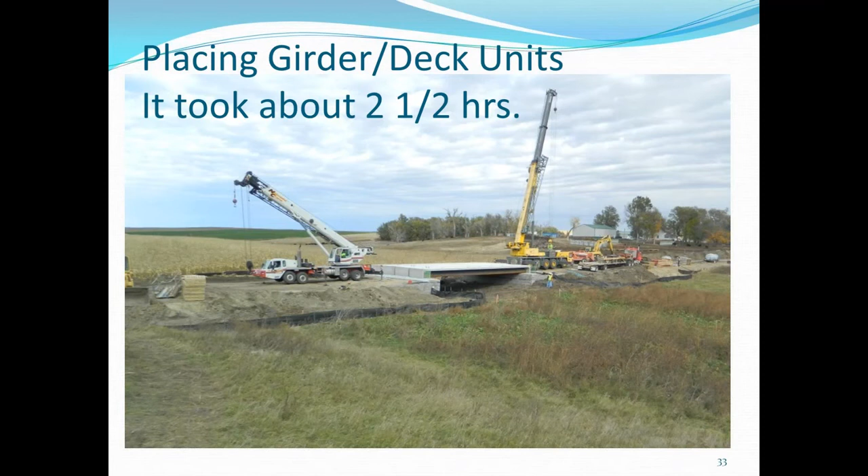And in the final position, can I add something to that, to the camber question? Sure. One of the reasons the folded plate is limited to 60 feet is that you cannot camber these things. But we've done quite a bit of study, and up to 60 feet, the deflection due to the load after the deck comes in is not noticeable at all.

The use of shored construction is actually more for the benefit of the ABC application than anything else. So if somebody wants to do an unshored basically construction, you can do that, and you can adjust your haunches for the profile. Shored construction also happens to be the most economical way of building these, which helps us control deflection. But for a 60 foot span, especially with the rigidity of the sections, deflection is not really a major problem.

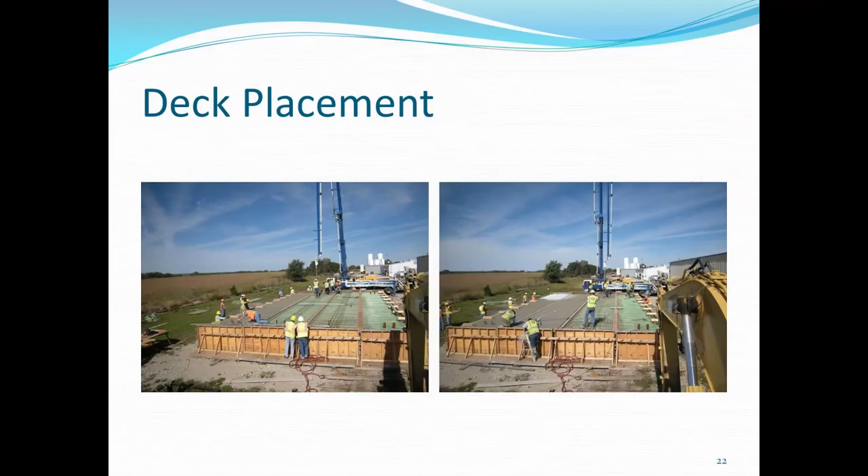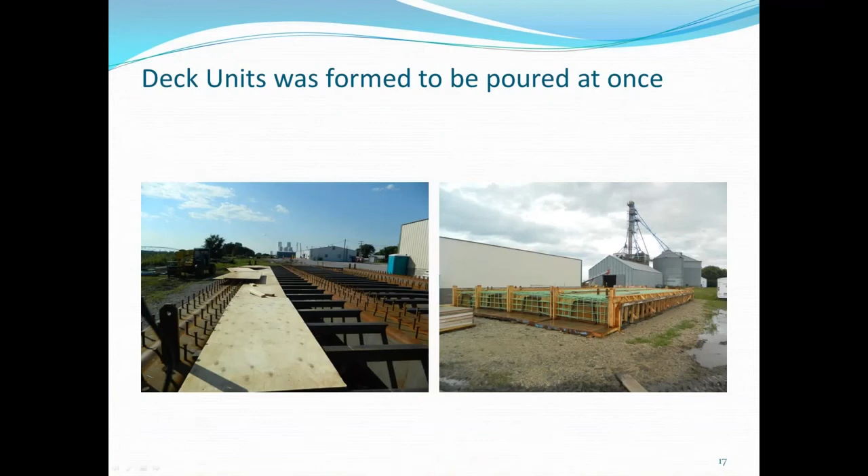Fouad, can you go to slide 20 really quick? I think that slide... 20, it was 19 I believe. Excuse me, go back one. Go back one more. 18, 17, keep going back. I thought it was 20.

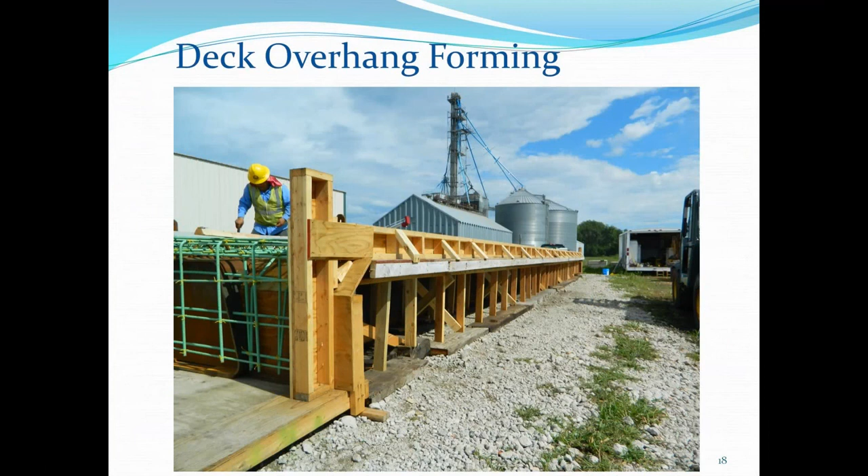I don't know if you mentioned it or not, Fouad, but these sections are actually cast individually. So per beam, there's a certain width of concrete deck that's placed, and all that restrained shrinkage is actually relieved while the concrete is being placed. Is that correct? Yeah, that is correct. There is an 8-inch joint between the forms.

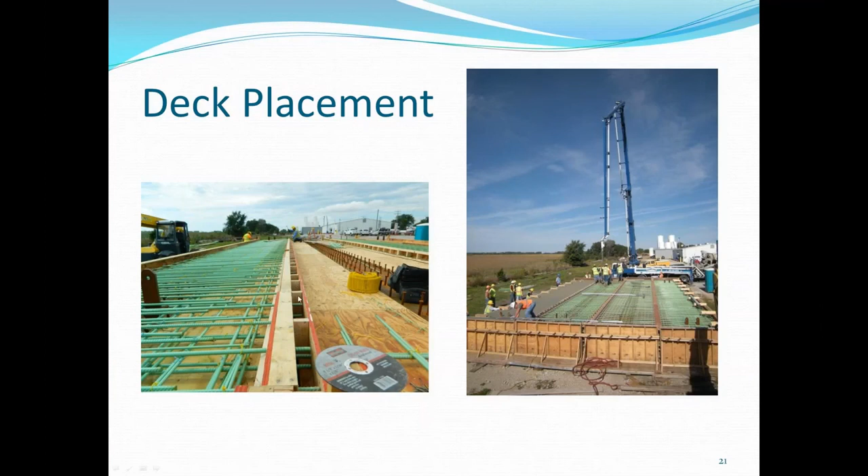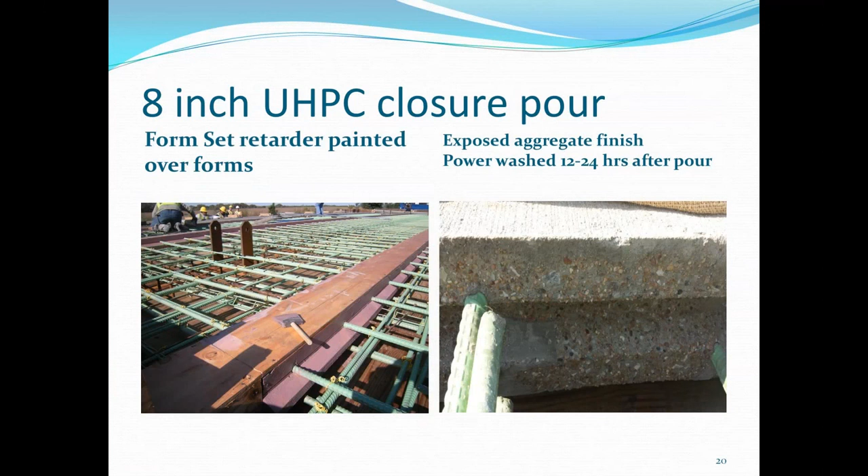Back onto that photo, it also shows and demonstrates that this contractor is pouring a concrete deck without having to use full fall protection. In this case the ADT isn't very high, but if you were in a high ADT situation with traffic adjacent to you, you wouldn't be in that situation.

So I agree, and they did not have to use a pouring machine, a Bidwell. We allowed them even to use screeding if he wanted to. He should have chosen hand finish, but granted, screeding could have done okay.

Luckily, we did that when we did it over the interstate. We had like a 160-foot two-span big box. The other contractor chose to pour each box individually because it gets too heavy on him, and that's what he did. He used screeding, but he told me it's very safe for him. He didn't have to go over the interstate, and so safety and insurance probably would be minimum for him for the next project. They liked the idea of pre-pouring over the interstate.

And you all have a 17-day concrete cure period for your decks, correct? That is correct, from now on that's our new policy - 10 days cured and 7 days curing compound. So that's really going to be an issue for accelerated construction. If we have to do it with time pressuring us, this 17-day period is going to be a problem, so either we have to go to precast or they have to do precast on the side.